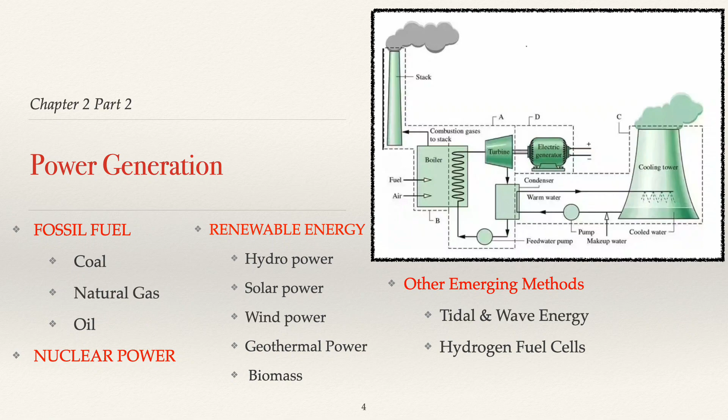Let's now venture into nuclear power generation, a highly efficient method of producing electricity. Overview of nuclear power generation.

Nuclear power generation relies on nuclear fission, a process where the nucleus of an atom is split into smaller parts, releasing a tremendous amount of energy in the form of heat. This heat is used to produce steam, which then drives turbines to generate electricity. Let's break down the working process into these key components: source, nuclear fission, heat generation, heavy water, steam turbine, electricity generation, cooling systems, and safety systems.

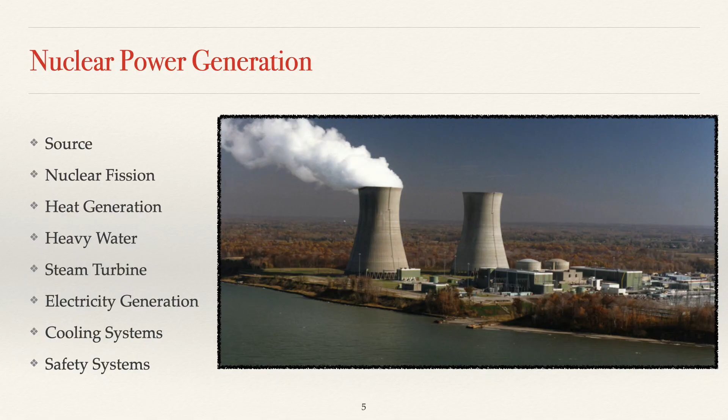How nuclear power generation works. Nuclear reactor: the primary fuel used in nuclear reactors is typically uranium-235 or plutonium-239. Uranium is the most common choice, often enriched to increase the proportion of uranium-235, which is more reactive and capable of sustaining a chain reaction. The uranium fuel is shaped into small pellets, which are loaded into fuel rods and placed within the reactor core.

Nuclear fission and heat generation. Nuclear fission occurs when a neutron collides with the nucleus of a uranium-235 atom, causing it to split into smaller atomic fragments. This splitting releases an enormous amount of energy in the form of heat, along with additional neutrons. The released neutrons go on to split other uranium atoms, creating a self-sustaining chain reaction that produces continuous energy.

The energy released from fission reactions generates intense heat within the reactor core. This heat is transferred to a primary coolant, usually water or heavy water, which flows through the reactor core to absorb the generated heat. Heavy water and steam production.

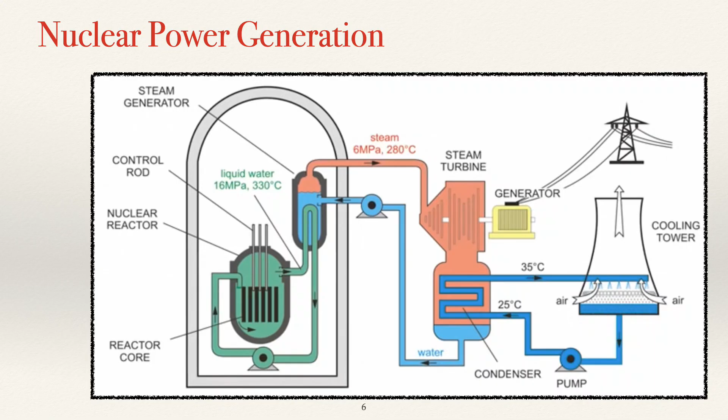Safety systems control rods. Control rods made from materials like boron or cadmium absorb excess neutrons to regulate or halt the fission reaction. When inserted into the reactor core, they slow down or stop the chain reaction.

Containment structure. Nuclear reactors are enclosed within a containment structure, a thick, reinforced concrete and steel shell designed to prevent the escape of radiation in the event of a malfunction.

Emergency Core Cooling System, ECCS. In case of an emergency, such as overheating, the ECCS rapidly cools the reactor core, helping to avoid a meltdown.

Radiation monitoring and shielding. Continuous monitoring systems are in place to detect radiation levels within and outside the plant. Shielding materials, such as lead and concrete, protect personnel and the environment from radiation exposure.

Key features of nuclear power generation. Low emissions: nuclear power plants do not emit greenhouse gases during operation, making them a clean energy source in terms of carbon emissions. High efficiency: nuclear power is one of the most energy-dense forms of power generation, meaning a small amount of nuclear fuel can generate a large amount of electricity.

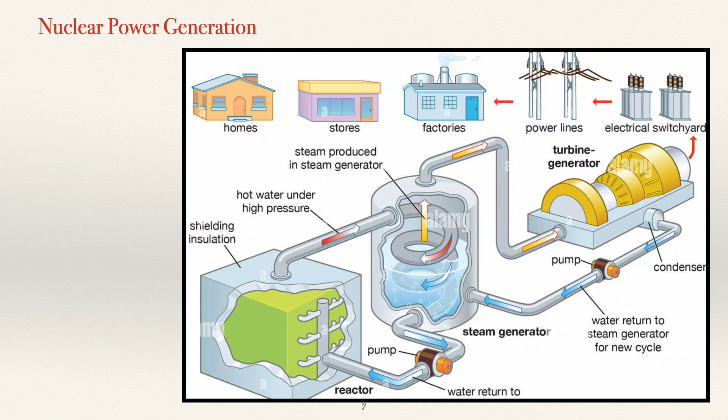Challenges and considerations. Radioactive waste: one of the biggest challenges of nuclear power is the disposal of radioactive waste, which remains hazardous for thousands of years. Safe long-term storage solutions are essential.

Nuclear accidents. While nuclear power is generally safe, accidents like Chernobyl and Fukushima have highlighted the potential risks of radiation leaks and environmental contamination. High initial costs: building a nuclear power plant involves high capital investment and long construction times, though operational costs are relatively low.

Fuel types. Uranium-235, the most commonly used fuel in nuclear reactors, is enriched from natural uranium to increase its concentration for sustained nuclear reactions. Plutonium-239, also used in certain types of reactors, is produced as a byproduct in uranium-fueled reactors.

In conclusion, nuclear power is a highly efficient and low-emission source of electricity. Despite its challenges, such as waste disposal and potential risks, it remains a key component of the global energy mix, particularly for countries looking to reduce their carbon footprint while maintaining reliable, large-scale power generation.

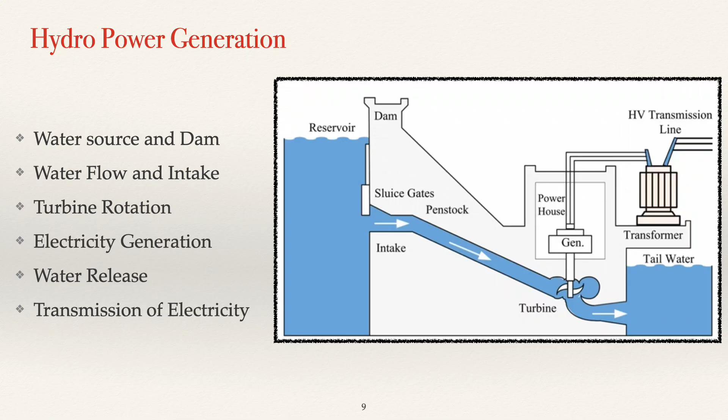Types of hydropower plants. Impoundment (reservoir-based) hydropower is the most common type. A large dam is built across a river to create a reservoir. Water is stored and released to generate electricity as needed.

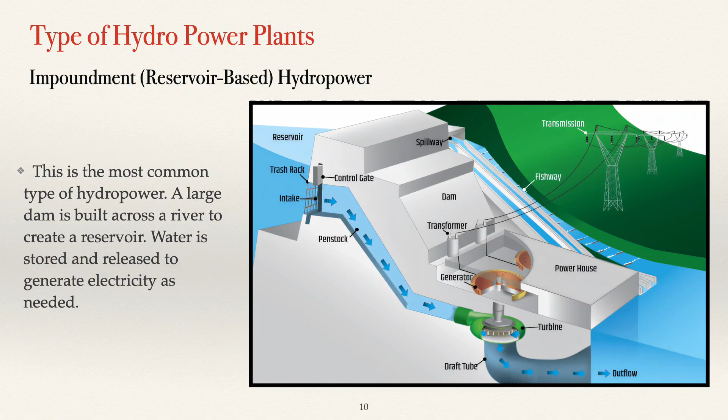Second is run-of-the-river hydropower. In this system, water is diverted from a river without the need for large dams or reservoirs. It uses the natural flow of the river to generate electricity, but is subject to seasonal flow variations.

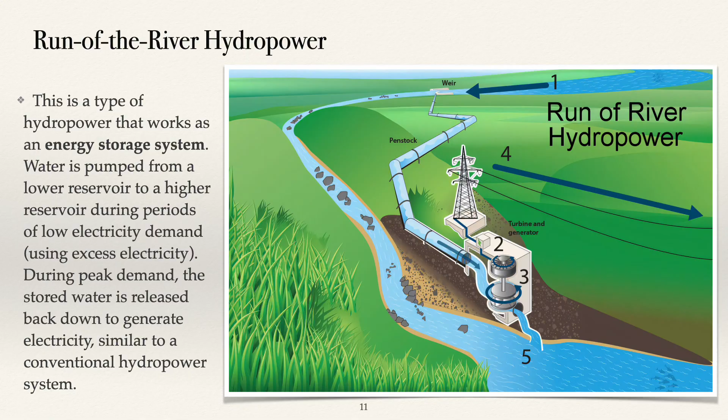Third is pumped storage hydropower. This is a type of hydropower that works as an energy storage system. Water is pumped from a lower reservoir to a higher reservoir during periods of low electricity demand, using excess electricity. During peak demand, the stored water is released back down to generate electricity, similar to a conventional hydropower system.

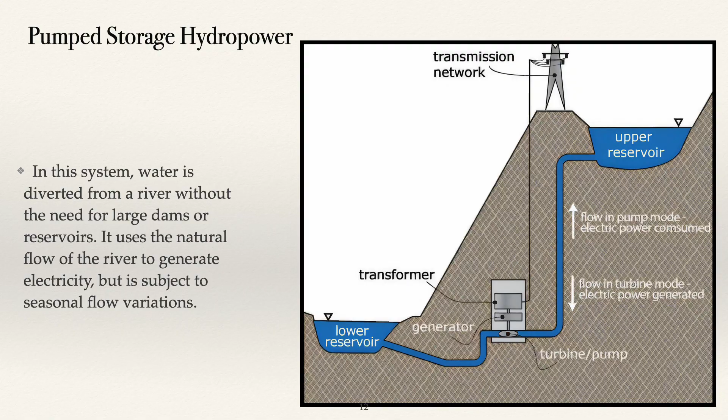Now let us look at the advantages of hydropower. As a renewable energy source, hydropower relies on the natural water cycle, making it renewable and sustainable. It is also reliable and efficient: hydropower plants can operate continuously and provide consistent electricity, with long lifespans and very high energy conversion efficiency.

Low greenhouse gas emissions: unlike fossil fuel-based power plants, hydropower does not produce direct greenhouse gas emissions during operation. Quick startup: hydropower plants can ramp up production quickly, making them excellent for balancing fluctuations in electricity demand or supplementing other power sources.

The challenges of hydropower include environmental impact. Dams and reservoirs can disrupt ecosystems, affecting fish migration, water quality, and habitats for aquatic and terrestrial life. Changes in water flow can also affect downstream ecosystems.

High initial cost: building dams and associated infrastructure requires significant upfront investment. Geographic limitations: hydropower is dependent on suitable geographic locations with sufficient water flow and elevation changes, and is not viable in flat or dry regions.

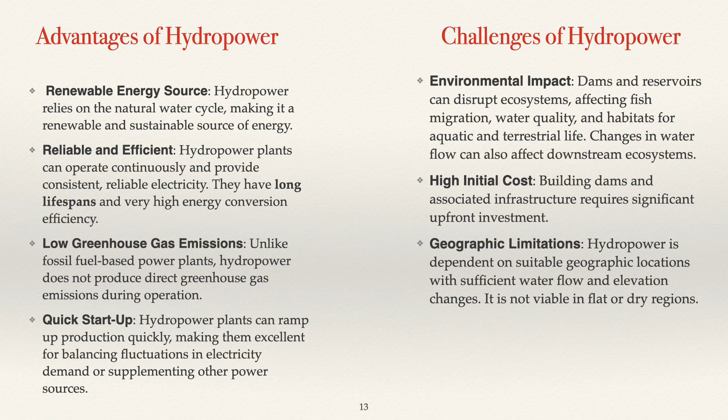In renewable energy, solar power generation plays a crucial role, second to hydropower generation. Despite the challenges of high initial setup costs and certain limitations in efficiency, solar power remains a key part of the future of energy generation.

Here are some of the main types of solar power generation: first, concentrated solar power (CSP); second, photovoltaic (PV) power generation; third, floating photovoltaic (FPV) power generation; fourth, building integrated photovoltaics (BIPV). These methods represent various ways solar energy is harnessed, each with its unique applications and advantages.

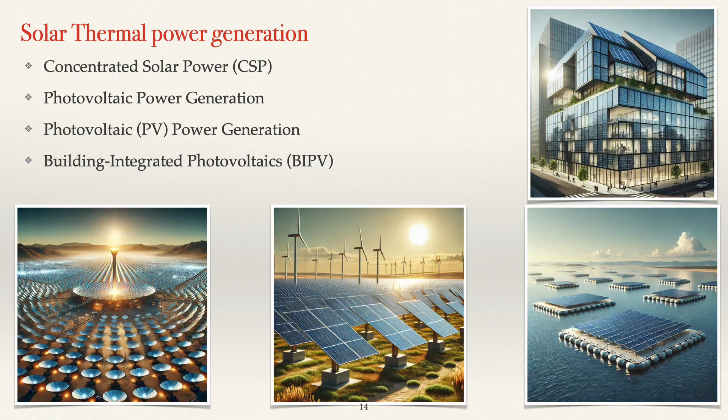Let us first explore concentrated solar power. Solar thermal systems focus sunlight to generate high temperatures, which produce steam that drives a turbine connected to a generator. Concentrating solar energy: solar collectors.

Solar thermal systems use mirrors or lenses to concentrate sunlight onto a focal point or onto pipes that carry a heat transfer fluid. There are several types of solar collectors, including parabolic troughs: curved mirrors that focus sunlight onto a tube containing a heat transfer fluid, typically synthetic oil, that runs along the focal line of the trough.

Solar power towers: thousands of flat mirrors called heliostats track the sun and focus sunlight onto a central receiver on top of a tower. This receiver contains a heat transfer fluid, often molten salt.

Parabolic dishes focus sunlight onto a single point, usually with a Stirling engine to convert heat directly into mechanical energy. Linear Fresnel reflectors: flat mirrors arranged in rows focus sunlight onto tubes containing fluid. These systems are simpler and less costly, but are generally less efficient.

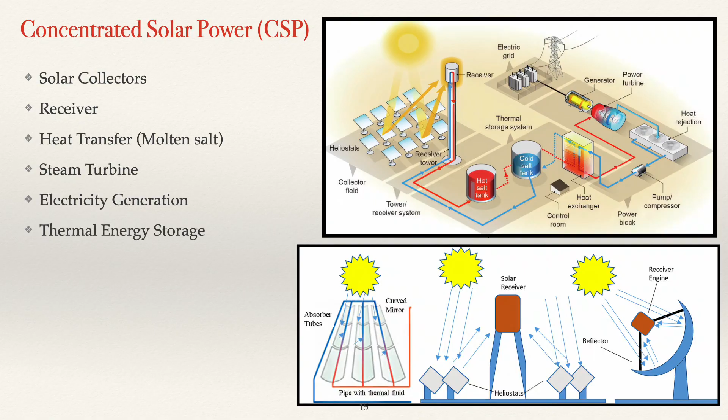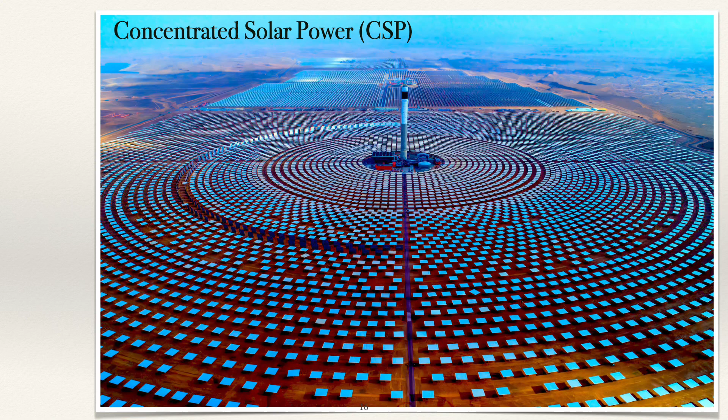Heat transfer and storage. Heat transfer fluid, often synthetic oil or molten salt, absorbs the concentrated solar energy, reaching temperatures of 300 to 1000 degrees Celsius (572 to 1832 degrees Fahrenheit), depending on the technology.

Thermal energy storage: some systems use molten salt as a storage medium. The heated salt can store energy for later use, allowing the plant to continue producing electricity even when the sun isn't shining, e.g., during cloudy periods or at night. This makes solar thermal power more flexible and reliable than traditional solar PV systems.

Steam generation: the heat transfer fluid, after absorbing solar energy, is circulated through a heat exchanger or steam generator, where it transfers its heat to water. The water is converted into high-pressure steam, which is then directed to a turbine. This process is similar to traditional thermal power plants, like coal or natural gas, except that solar energy is the heat source.

Turbine and generator operation. Turbine rotation: the high-pressure steam flows through a turbine, causing it to spin. This converts the thermal energy from the steam into mechanical energy.

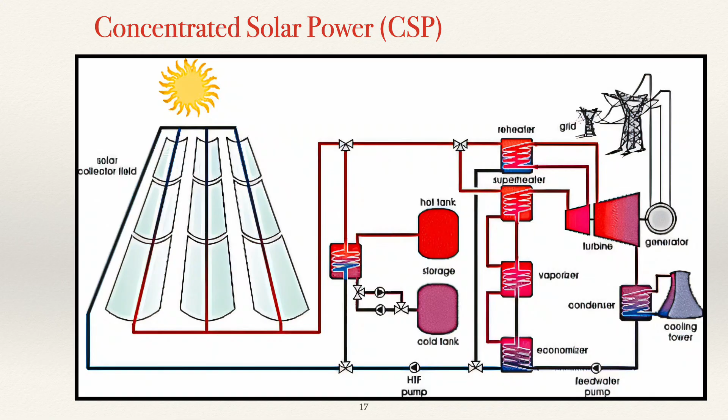Next is solar photovoltaic power generation. It involves converting sunlight directly into electricity using solar cells made from semiconductor materials. This process, known as the photovoltaic effect, does not rely on any moving parts or the production of heat, making it a clean and efficient way to generate electricity from the sun.

Solar panels and solar cells. Solar panels consist of multiple solar cells connected together. Each cell is made from semiconductor materials, typically silicon, which have special properties that allow them to convert light energy into electrical energy.

Solar cells: a solar cell is the fundamental building block of a solar panel. It contains layers of silicon, which are specially treated or doped with other elements to create an electric field across the cell.

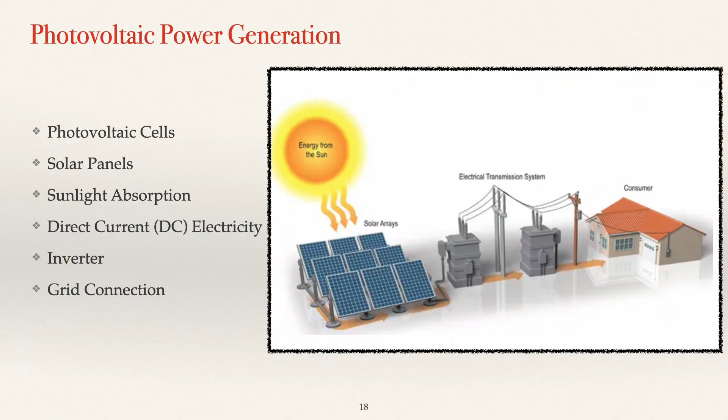Photovoltaic effect: absorption of sunlight. When sunlight hits the surface of the solar cell, the energy from the light, in the form of photons, is absorbed by the silicon atoms in the cell.

Electron excitation: the energy from the photons excites electrons in the silicon atoms, knocking them loose from their atoms and allowing them to move freely. This movement of electrons is the basis for creating an electric current.

Creation of electric field: the solar cell is designed with a positive and a negative layer, forming an electric field. This electric field forces the free electrons to move in a specific direction, creating a flow of electrical current.

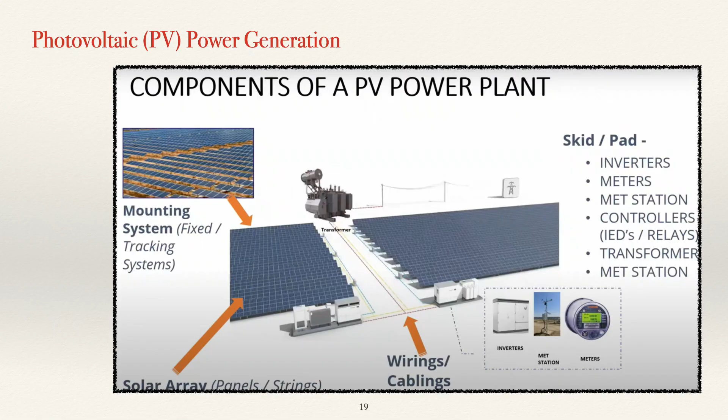Electricity generation. Flow of current: as the electrons move, they flow through the electrical circuit created within the solar cell. This flow of electrons generates direct current (DC) electricity.

Connection to other cells: each solar cell generates a small amount of electricity on its own. To produce a usable amount of power, multiple cells are connected together within a panel. These panels can then be connected to form larger solar arrays to generate more electricity.

Conversion to usable electricity: the inverter. The DC electricity generated by the solar panels is not compatible with most household appliances, which require alternating current (AC) power. An inverter is used to convert the DC electricity into AC electricity so it can be used in homes, businesses, or fed into the power grid.

Grid connection: in grid-connected systems, the AC electricity from the inverter is fed directly into the electrical grid, where it can be distributed to other users. In standalone or off-grid systems, the electricity is often stored in batteries for later use.

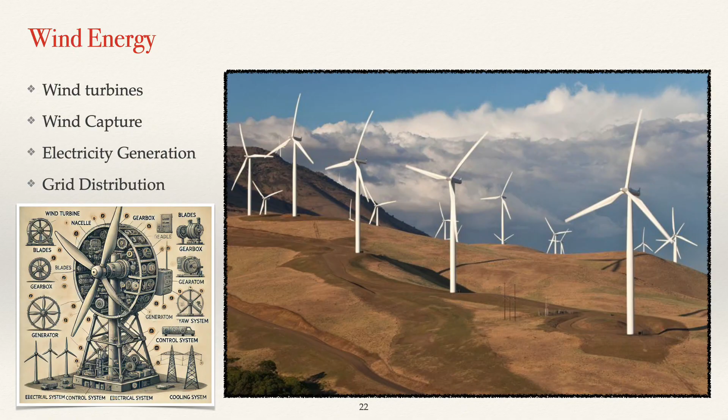Transmission through the gearbox. In most wind turbines, the low-speed rotation of the blades is connected to a gearbox that increases the rotational speed. This step up in speed is necessary to reach the thousands of revolutions per minute (RPM) needed to generate electricity efficiently in the generator.

Direct drive turbines. Some modern wind turbines are direct drive and do not use a gearbox. Instead, they use a larger generator designed to operate at lower rotational speeds, which reduces maintenance and improves reliability.

Electricity generation in the generator. The high-speed rotation from the gearbox, or directly from the rotor in direct drive turbines, is transferred to a generator, typically located within the nacelle.

Electromagnetic induction: inside the generator, the rotating rotor spins within a magnetic field, inducing an electric current in the stationary coils (stator). This process converts the mechanical energy from the spinning blades into electrical energy. The generated electricity is typically alternating current (AC), which is compatible with the electrical grid.

Voltage conversion and grid connection. Transformer: the electricity produced by the generator is usually at a lower voltage. A transformer, often located at the base of the turbine tower, steps up the voltage for efficient transmission.

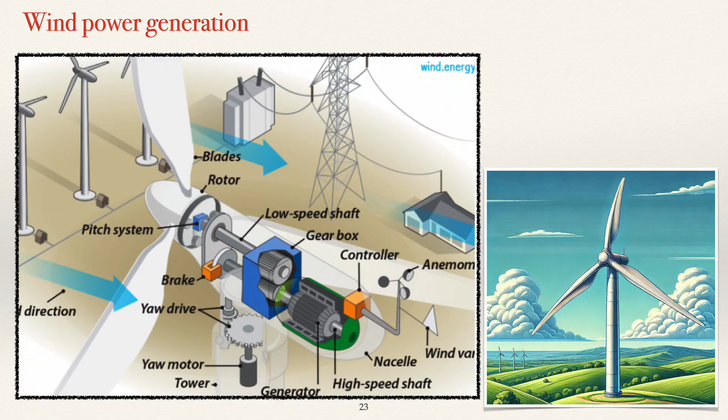Biomass power generation involves converting organic materials, known as biomass, into electricity. Biomass can include wood, agricultural residues, animal waste, and other organic matter. This process is renewable, as plants absorb carbon dioxide during growth, offsetting the CO2 released when the biomass is burned.

Collection and preparation of biomass. Types of biomass: common sources include wood chips, crop residues like corn stalks and rice husks, animal manure, and even municipal waste. Some power plants also use dedicated energy crops, such as switchgrass and fast-growing trees like willow and poplar.

Biomass processing: biomass is usually collected and processed to make it suitable for energy production. Processing may involve drying, shredding, or pelletizing to improve combustion efficiency.

In some cases, biomass is transported to the power plant in a processed form, like wood pellets or briquettes. There are several methods to convert biomass into electricity, and the choice of technology depends on the type of biomass and the scale of power generation required.

The main conversion methods are direct combustion. Biomass is burned in a boiler to produce steam, which drives a turbine connected to a generator, producing electricity. This is similar to coal-fired power generation, but uses organic materials as the fuel source.

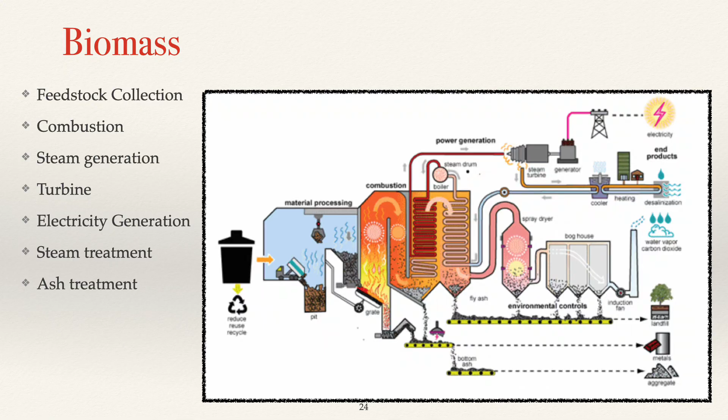Geothermal power generation harnesses heat from the Earth's interior to produce electricity. This process takes advantage of naturally occurring heat stored within the Earth's crust, which can be accessed by drilling into geothermal reservoirs.

Locating geothermal resources: geothermal energy is often found near tectonic plate boundaries, volcanic regions, or areas with hot springs or geysers. These areas have geothermal reservoirs containing steam, hot water, or high-temperature rocks.

Exploration and drilling: geothermal exploration involves geological surveys, mapping, and drilling test wells to confirm the presence of geothermal resources. Once a suitable site is identified, production wells are drilled to access the geothermal fluid or steam.

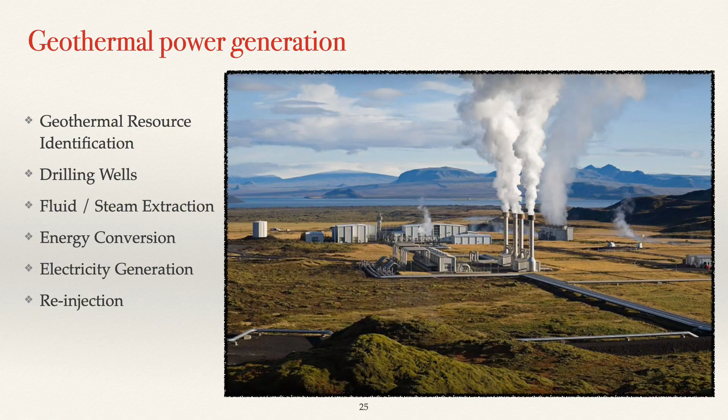Types of geothermal power plants: there are three main types of geothermal power plants, each designed to accommodate different types of geothermal resources.

Dry steam plants are the oldest type of geothermal power plant. They use steam directly from geothermal reservoirs to turn a turbine. This method is used where natural underground steam is available, such as at the geysers in California.

Flash steam plants, the most common type, use high-pressure hot water from geothermal reservoirs. As the water reaches the surface, it rapidly flashes into steam due to the pressure drop. This steam is then used to drive a turbine.

Binary cycle plants use moderate-temperature geothermal resources. Instead of directly using the geothermal fluid, it heats a secondary fluid with a lower boiling point, such as isobutane or pentane. The secondary fluid vaporizes and drives a turbine, while the geothermal fluid is re-injected into the ground.

Heat extraction and steam production. In flash steam and dry steam plants, hot water or steam is brought to the surface through production wells. For binary cycle plants, hot water is pumped through a heat exchanger, transferring heat to a secondary fluid.

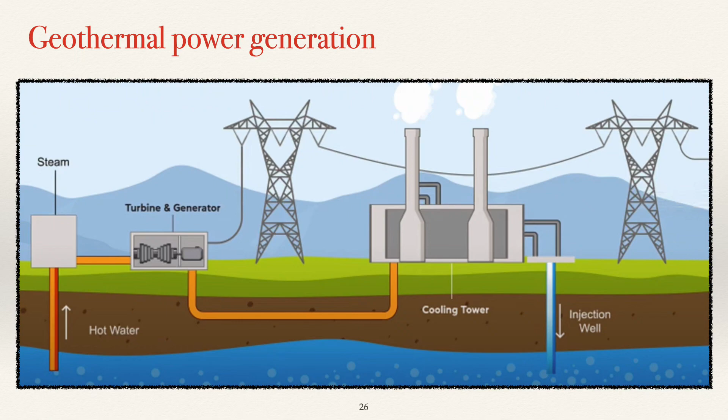In summary, geothermal power generation harnesses the heat from the Earth's interior to produce electricity. This renewable energy source is extracted from naturally occurring hot water reservoirs, steam, or heat within the Earth, using the three main methods we have explored.

Geothermal power is a reliable and sustainable energy source with minimal greenhouse gas emissions, making it a valuable addition to renewable energy portfolios.

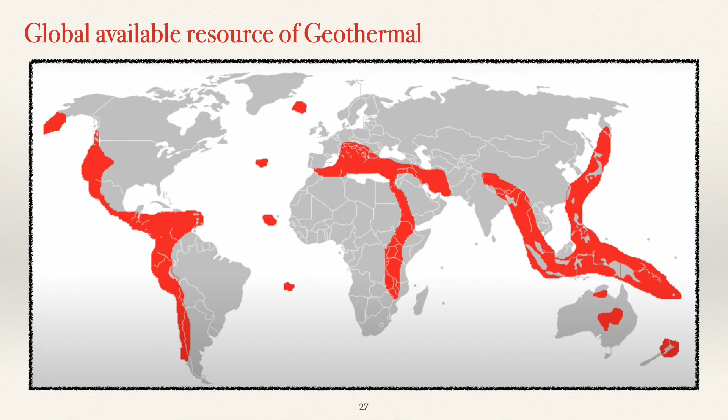Hydrogen power generation uses hydrogen as a fuel to produce electricity, typically through a process called fuel cell technology. This method is clean, efficient, and produces only water and heat as byproducts, making it an attractive renewable energy option. Hydrogen can be generated from a variety of sources, including water, natural gas, and biomass.

Production of hydrogen fuel: electrolysis. Hydrogen can be produced by splitting water, H2O, into hydrogen, H2, and oxygen, O2, through a process called electrolysis. In this method, an electric current is passed through water, separating it into its component gases. If renewable electricity is used, the process is emissions-free.

Steam methane reforming, SMR. Currently, most hydrogen is produced from natural gas in a process called steam methane reforming. This process generates hydrogen and carbon dioxide, CO2. While SMR is efficient, it produces CO2 emissions, which need to be captured and stored for a cleaner process.

Biomass gasification. Hydrogen can also be produced from organic materials through gasification. Biomass is heated in a low-oxygen environment, producing hydrogen-rich syngas, a mixture of hydrogen, carbon monoxide, and other gases. This gas can then be processed to extract pure hydrogen.

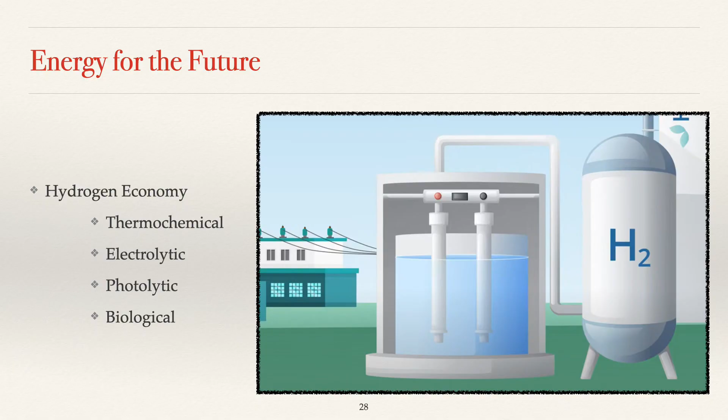Tidal and wave power generation harness the natural movement of ocean water to produce electricity. Both methods are forms of marine energy that utilize the mechanical energy in water movements, but they capture energy from different sources. Tidal energy comes from the regular rise and fall of sea levels, while wave energy is generated by the movement of the ocean's surface.

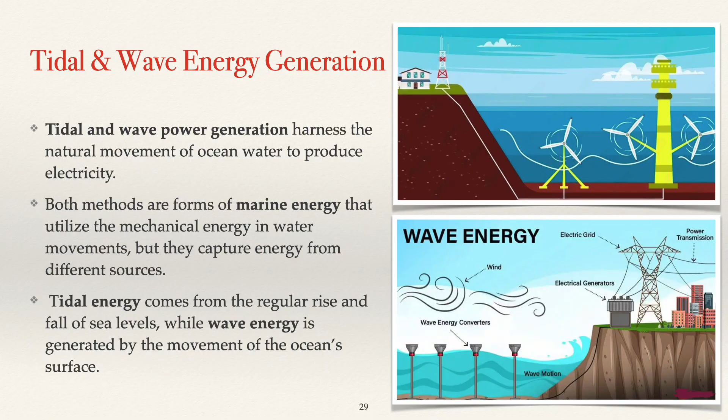Tidal power generation relies on the gravitational pull of the moon and the sun, which causes periodic rises and falls in sea levels. These movements create predictable, renewable energy sources.

Types of tidal power systems. Tidal barrages: a tidal barrage is a dam built across the entrance of a tidal basin. As the tide rises and falls, water flows in and out of the basin through turbines within the barrage, generating electricity. Tidal barrages take advantage of the difference in height, called the tidal range, between high and low tides.

Tidal stream generators are similar to underwater wind turbines. They are placed in fast-moving tidal currents, where the flow of water rotates the turbine blades, driving a generator to produce electricity. This method is less invasive than a barrage and can be used in narrow channels with strong tidal currents.

Dynamic tidal power, DTP, is a less common and experimental technology that involves constructing long dams extending out from the coast into the ocean. DTP aims to create artificial tidal currents, which can then be used to generate power.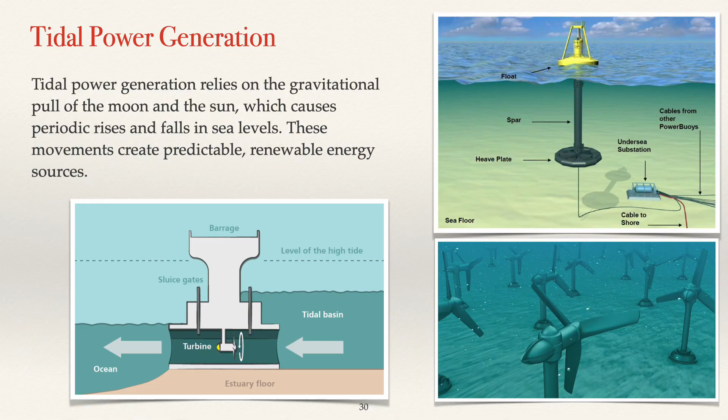Point absorbers are floating structures anchored to the sea floor. As waves move past, they cause the structure to rise and fall. This motion drives a hydraulic or mechanical system, which in turn powers a generator.

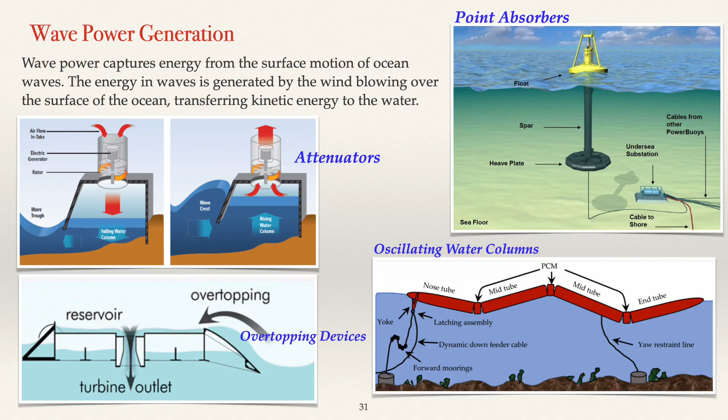With this, we have completed our study on power generation. In the next chapter, we will explore the requirements and prerequisites for starting transmission line construction, setting the foundation for the next stage of our learning.

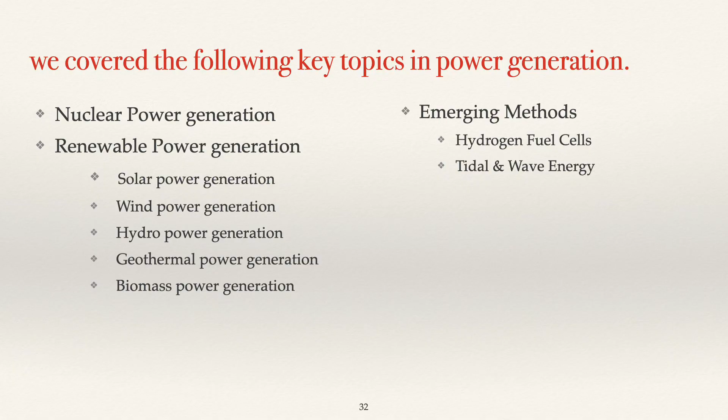As we progress through our study program, we'll be emphasizing the importance of professional ethics by integrating key values at each step. Understanding what professional ethics entail and recognizing their significance are essential for us as professionals. These ethics guide our actions, ensure integrity, and foster trust in our careers, shaping not only our interactions, but also the impact we have in our respective fields.

Professional ethics encompass the moral principles and standards that shape our conduct within our chosen professions. Typically outlined in a profession-specific code of ethics, these guidelines are designed to ensure that we act with integrity, responsibility, and respect in all our interactions, whether with clients, colleagues, or the broader community. By adhering to these ethical standards, we uphold the trust and credibility essential to our professional roles.

Let's break down some key components. Integrity: professionals should always act honestly and be truthful in their dealings, avoiding deceptive practices and upholding fairness.